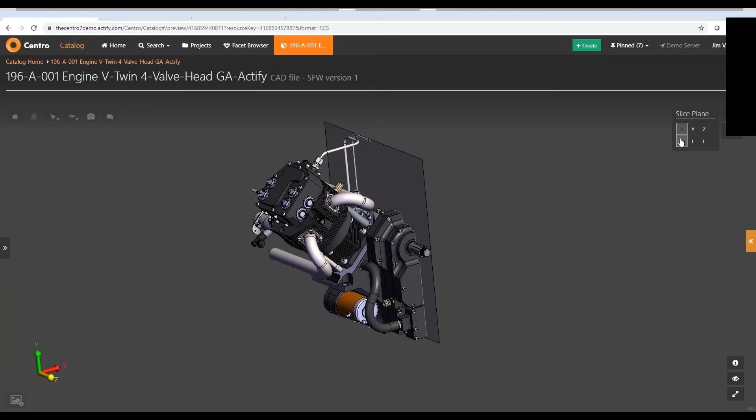Now this can be viewed on a PC, on a laptop, on a tablet. You can actually view this on your phone. Of course, my eyes aren't good enough to view this on a phone, but it does work because it's using web technology. It is not using any download plugin that's required.

So I see the assembly, and I can see the assembly tree over on the side here. This allows you to pick and choose what files you're looking at.

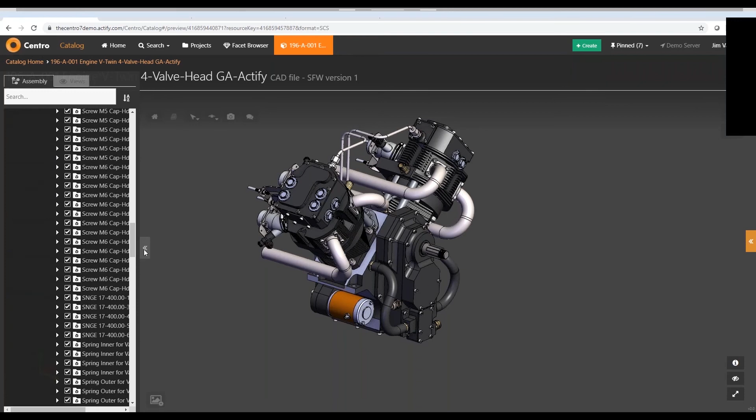I have access to a subset of the SpinFire functionality. As an example, I may want to come in and just get a few diameters, or maybe an edge length on some of these components, which gives you an idea of the size of these things. Again, there's edge, angular, surface to surface, and such.

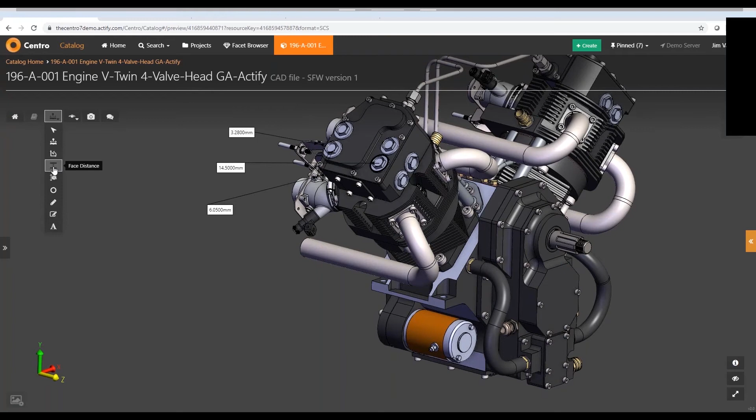This also gives me the ability to share and collaborate information that I find necessary to share with others. We call that snapshots - basically showing or collaborating whatever is important for you at that time with other people who will be logging in here.

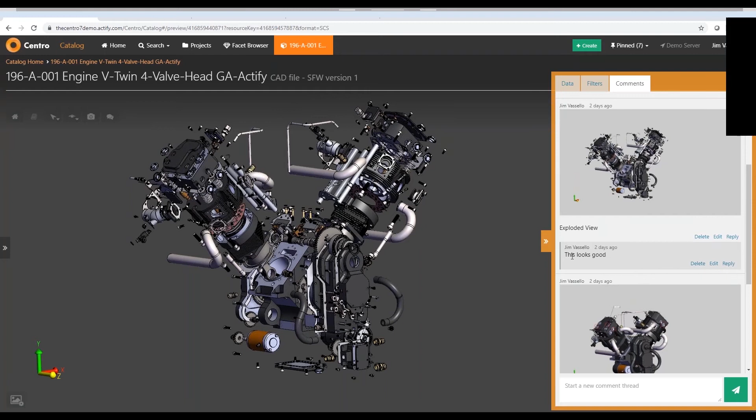So here's a snapshot of the assembly tree, and here's a snapshot of the exploded view. Again, whoever logs in can look at this, they can add comments, they can delete if they have authority, they can add their own. Here's some markups that were added. So this collaboration effort allows you to very easily access this information in a global environment and share that with others.

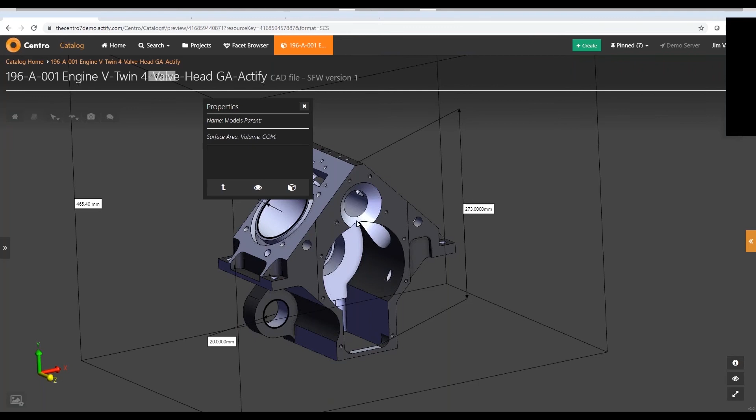I also have other information here that I could see, maybe any cost data associated to that, maybe the physical properties that are associated to that. I can do a quick bounding box of that component, which also shows the surface area and volume and so on.

Here's the bounding box. So this is a good way to very easily access information globally in your environment, and if you want to share with others as well, that's also possible.

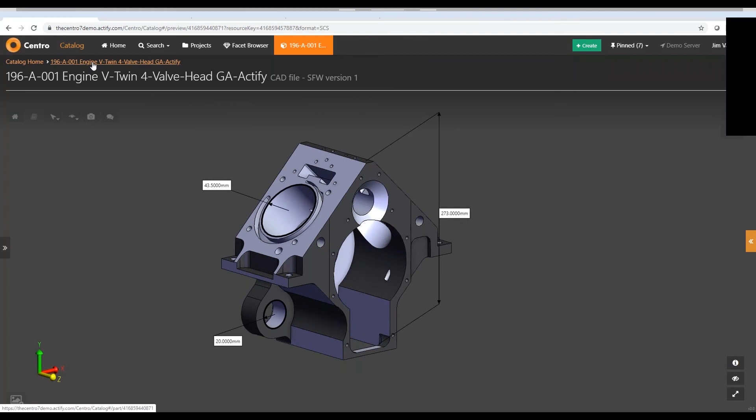So if I go back to what we call the catalog part view page, this is the page where information gets both automatically and manually uploaded to the database and is now viewable in this mode we call the part view page. As you can see, we see the assembly structure over on the left-hand side. We see resources, which are all files currently in the database related to this product, and some of these have automatically been published.

The CAD file - we may create a step file, the SpinFire web file, and we can put these into different categories. You may have engineering documents, PMI data, quality, sales, supporting documentation. Anything related to this is now in the database, associated to this product, version controlled, and if there are multiple versions, you have access to whichever version you want, the latest being the one shown here.

So you could check out, modify, check back in, then others can see that version, and it shows whoever had performed that update.

Other information you can have includes the cost information we saw on the previous screen, maybe failure rate, maybe physical properties, whatever. These are data docs, a subset of a spreadsheet, so there's a lot of information here, and there's links to different things.

I may want links to the tooling, maybe a link to one of the business tools. Here is the scorecard as one of the business tools I can link to, and other things. So again, I'll move on.

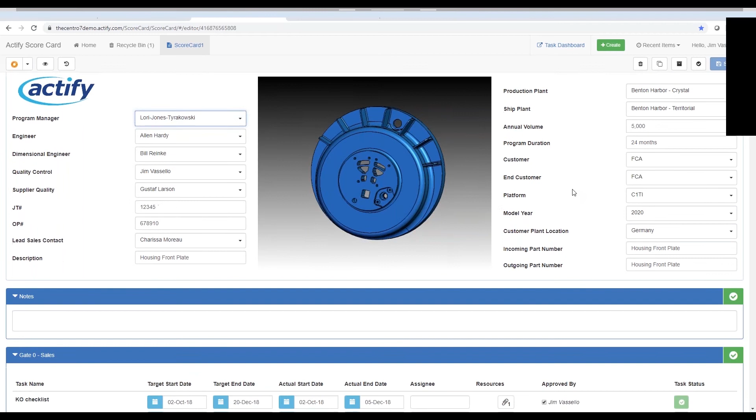So I have this information now, it's in the database, I can search on it. I have other people who can log in, make modifications and so on. And in this particular one, it goes through multiple different gates that have different task names, different dates associated to that, any assignees, and the task status of whether it's good, bad, or in between.

We have resources that you can download, maybe there's a 3D PDF file in here, or I may want to upload additional documentation to this component. Once it's in here, it's in the database, the latest is available. As long as you have permission to come in and look at this information, it is there and available. So we have different gates: the sales gate, program award, tooling, and so on.

I'll just scroll through here a little bit, and then we get down to the APQP information and the PPAP information. So all this is available to those users who have access and can log in. You don't necessarily need to go to the previous catalog screen. A lot of times I can get all the information shown here, and I can just minimize these to get an idea of how many there are.

A lot of these were created from what used to be Excel spreadsheets, because everybody knows Excel spreadsheets, so if they look familiar, that's exactly why. The learning curve is very small here because people are used to this type of user interface. Although now it's not on somebody's PC, on the network drive, with multiple copies and so on, it's in one location, always the latest update.

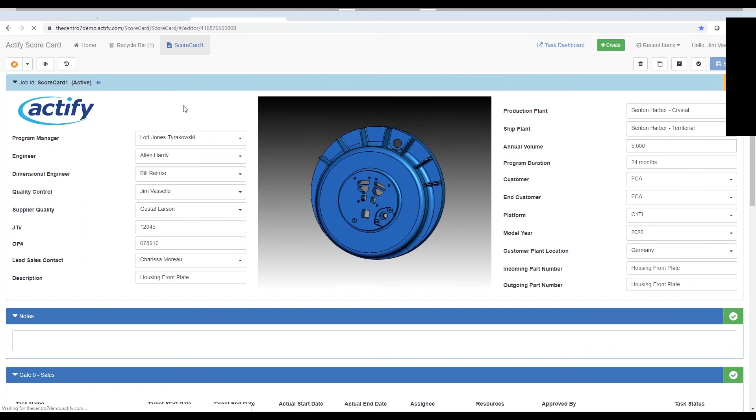From here we have the task dashboard, which shows a dashboard of all the different tasks with the dates and the status of those tasks. So it allows you to go back in time or forward in time to see where we stand. It's a good overall view of all the different tasks, where they stand, if they've been completed—you can see overdue, completed, at risk, and so on.

So I can go back in time to see if there were bottlenecks, and if there were, why—I can investigate why. Or I can go into the future to see if I have any upcoming bottlenecks, whether in human resources, a production plant resource, or whatever resources are being used. Then I have the ability to reallocate, whether it's a manufacturing plant or different engineers, whoever's involved. So it gives a good overall view of everything in progress.

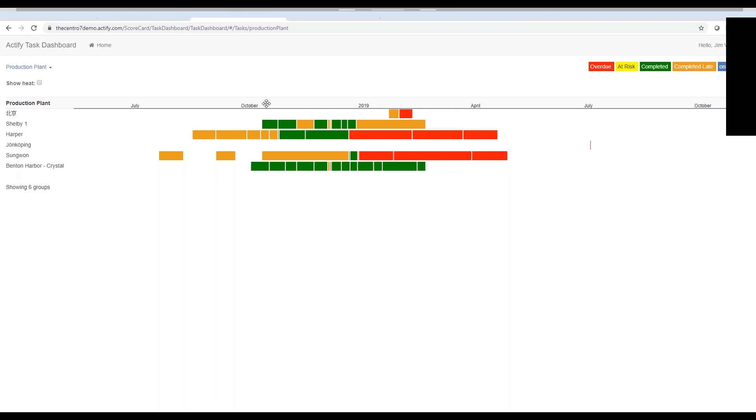There's another one I like to show, which is for doing quoting.

Now, again, this is just an example. Yours most likely will be a little bit different. That's where the customization comes in. But in the background, it's using the same database that's being used by the catalog and all the data in there. Some of this information could be manually keyed in. You may want to pull this from some cost accounting system or some ERP system, or you may want to upload to the ERP system, bidirectionally. We have that capability as well. So there's a lot of functionality here.